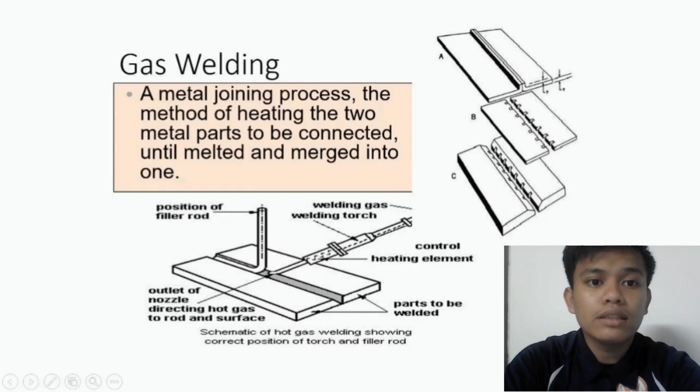Gas welding has two types, that is low pressure gas welding and high pressure gas welding. Low pressure gas welding uses acetylene gas supplied from the acetylene generator at a pressure less than 1.0 bar. High pressure gas welding uses gas from the acetylene gas generator with pressure from 1 to 15 bar.

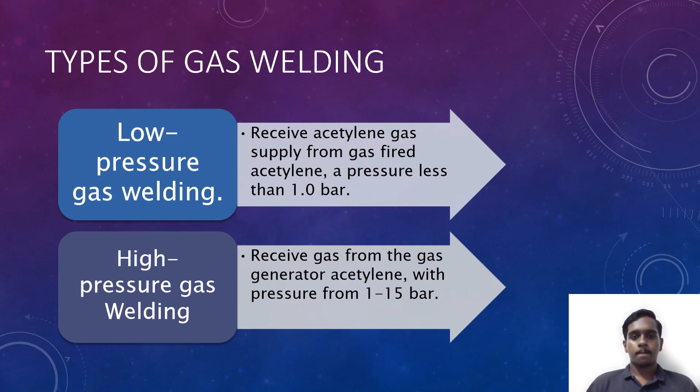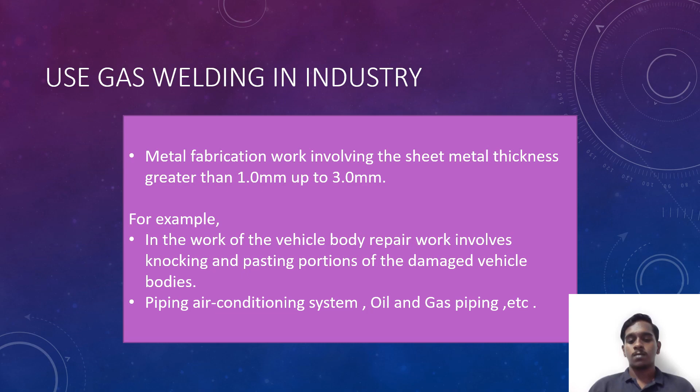Next, uses of gas welding in industry. Metal fabrication: metal fabrication works involving sheet metal thickness greater than 1.0 mm up to 3.0 mm. For example, vehicle body repair works involve knocking and pasting portions of the damaged vehicle bodies. Second, piping: air conditioning systems, oil and gas piping, etc.

The welding profession provides a wide range of career options. Many welding jobs are associated with high-risk work environments such as underwater commercial diving or oil pipeline construction. Expert welders, such as those working on pipelines and in underwater environments, are qualified for the most difficult and therefore highest paying jobs.

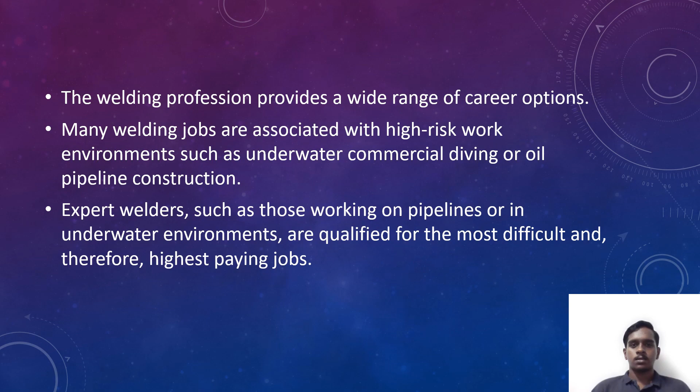Many welding jobs are high risk, so welders must wear an apron, safety goggles, safety boots and more to reduce the risks. Three types of welding, that is metal fabrication, pipeline welding and underwater welding. Metal fabrication: welders that work in metal fabrication are responsible for the assembly, shaping and welding of metal pieces incorporated into structures and machinery.

Next is pipeline welding. Pipeline welders, or pipe fitters as they are often called, are responsible for producing secure pipelines used for transporting water, oil, gases, and other hazardous material. The degree of difficulty in pipeline welding is higher than most other welding jobs because many pipeline welding projects take place outdoors where welders are exposed to unpredictable weather conditions.

Last is underwater welding. Underwater welders are trained to be proficient in wet welding and dry welding techniques. Wet welding involves a special electrode with DC power, and dry welding takes place in a hyperbaric chamber filled with a breathable mixture of helium and oxygen.

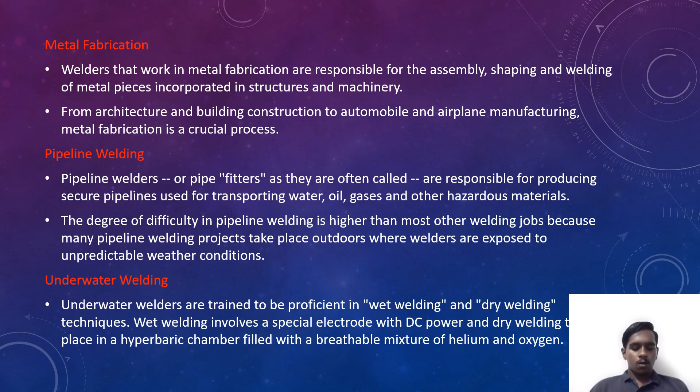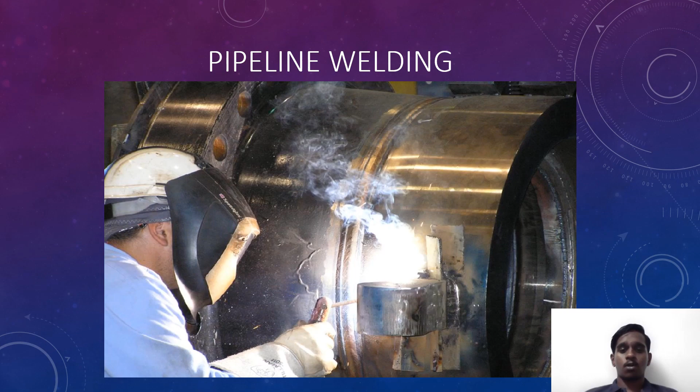Gas welding operation. Gas welding is accomplished by melting the edge of surface and mixing with a gas flame and allowing the molten metal to flow together, thus forming a solid continuous joint upon cooling.

The process is particularly suitable for joining metal sheet and plates with thickness of 2 to 50 mm. The filler material of more than 15 mm thick is added to the weld as the welding rod.

Several gas combinations can be used to produce a hot flame for welding metals. Common mixtures of gases are oxygen and acetylene, oxygen and hydrogen, oxygen and other fuel gases, and air and acetylene. Oxygen and acetylene mixtures are used in much larger quantities than others and occupy a prominent position in the welding

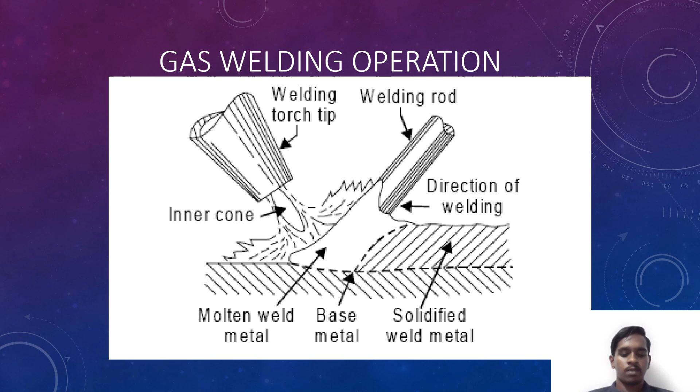industry. The temperature of the oxygen acetylene flame in its hottest region is about 3200 Celsius, while the temperature obtained in the oxygen hydrogen flame is about 1900.

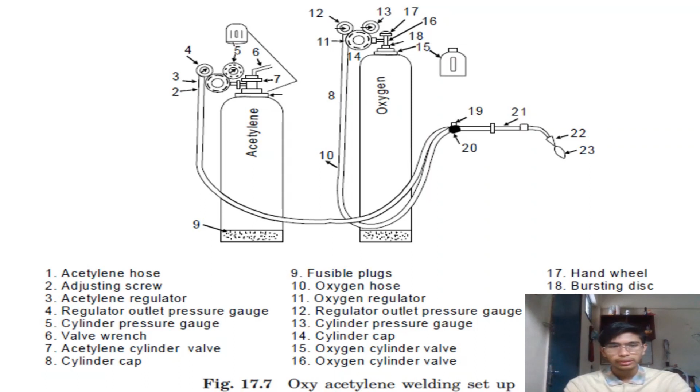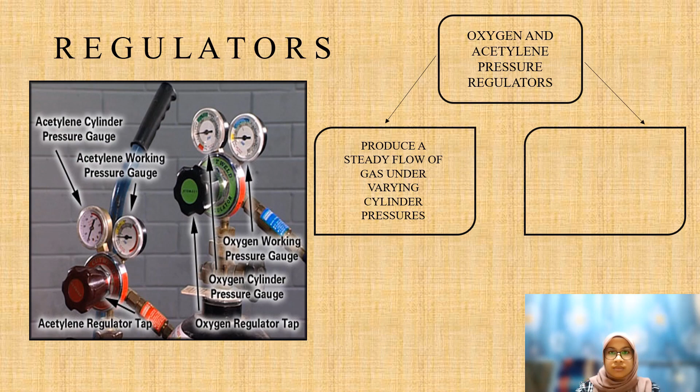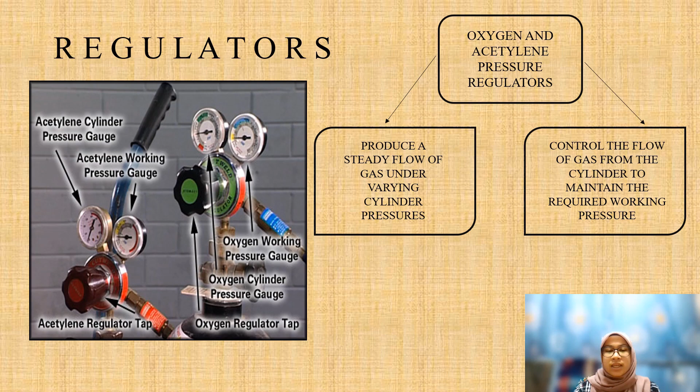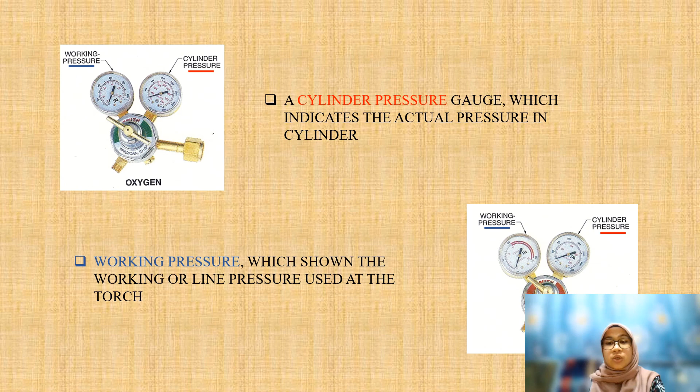A cylinder pressure gauge, which indicates the actual pressure in the cylinder. Cylinder pressure menunjukkan tekanan gas sebenar dalam silinder. Working pressure, which shows the working or line pressure used at the torch. Working pressure ialah tekanan gas yang dikeluarkan semasa melakukan kerja kimpalan.

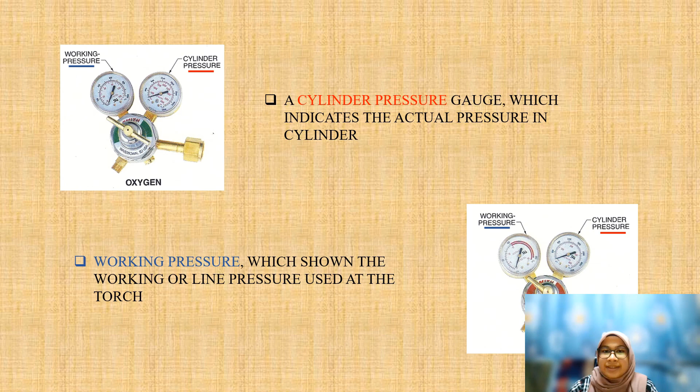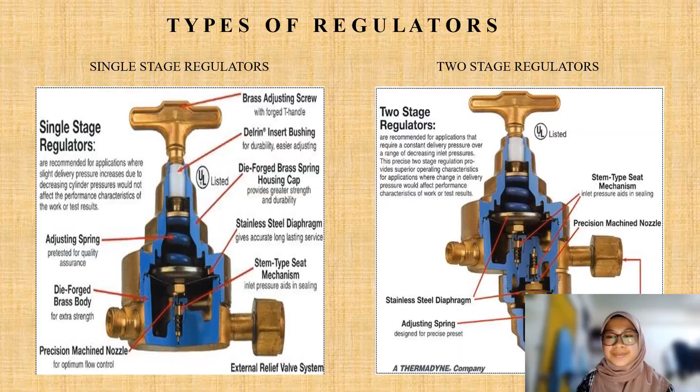There are two types of regulator: single stage regulator and two stage regulator. Firstly, the single stage regulator. Single stage regulator has a high pressure area where the high pressure of the cylinder goes directly into this space.

Secondly, the pressure reading can be seen on the needle, and the regulator reduces the pressure to work in accordance with appropriate adjustment using the adjustment screw regulators pad.

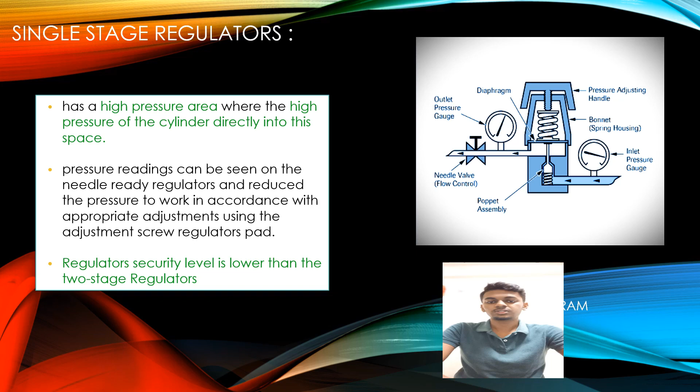Now, two-stage regulator. The two-stage regulator has two chambers: high pressure and low pressure area. Secondly, the high pressure area of the regulator accepts the high pressure in the cylinder and the pressure reading can be read on the pressure gauge.

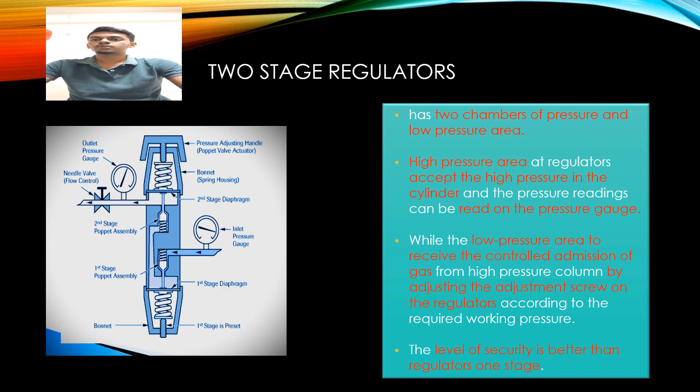In addition, most regulators have two stages. The first stage of the regulator is a fixed pressure regulator whose function is to release the gas from the cylinder at constant intermediate pressure despite the pressure in the cylinder falling as the gas cylinder is used.

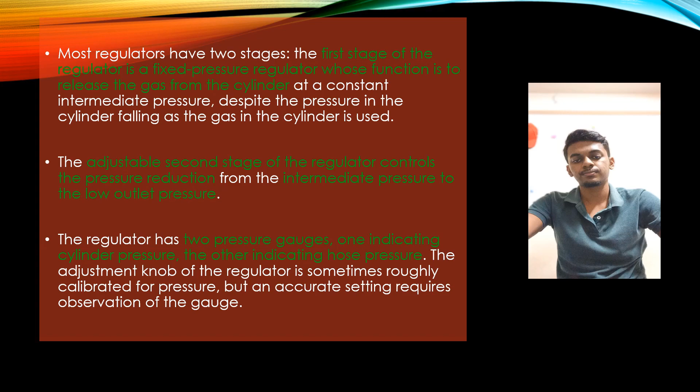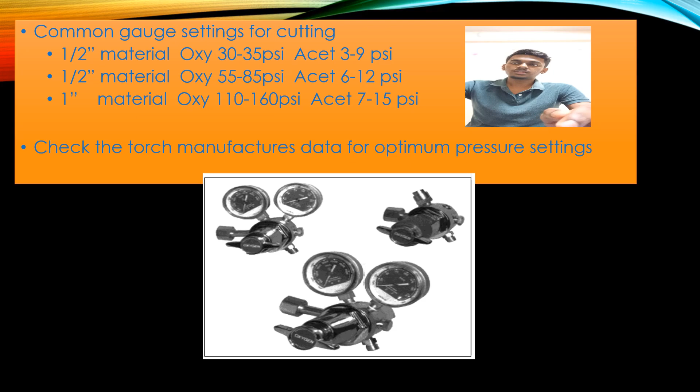The common gauge settings for cutting: one-half material, oxygen 30 to 35 psi and acetylene 3 to 9 psi. For one-half material, oxygen 55 to 85 psi, acetylene 6 to 12 psi. And lastly, for one material, oxygen 110 to 160 psi, acetylene 7 to 15 psi.

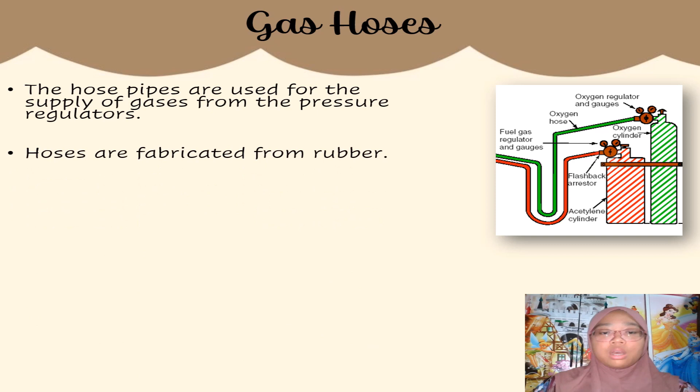So today I will present to you guys about gas hoses. The hose pipe is used for the supply of gases from the pressure regulators. Hoses are fabricated from rubber. Oxygen hoses are green in color and have a right-hand thread. Acetylene hoses are red in color with a left-hand thread. Left-hand threads can be identified by a groove in the body of the nut, and it may have an ACET stamp on it.

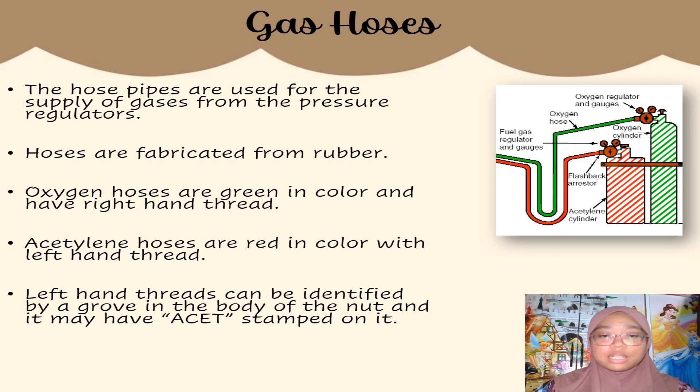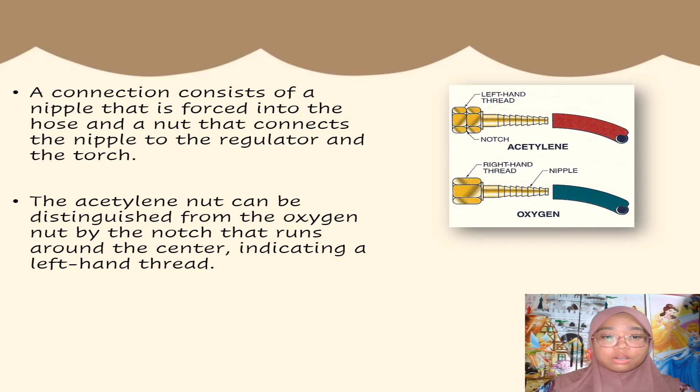A connection consists of a nipple that is forced into the hose and a nut that connects the nipple to the regulator and the torch. The acetylene nut can be distinguished from the oxygen nut by the notch that runs around the center, indicating a left-hand thread. So in this picture we have acetylene and oxygen. For acetylene, we have left-hand thread and notch. For oxygen, we have right-hand thread and nipple.

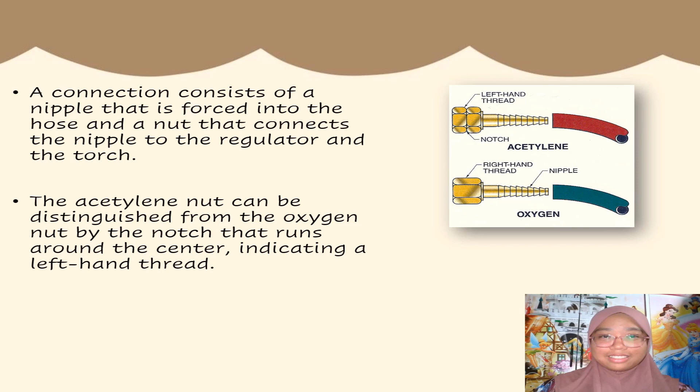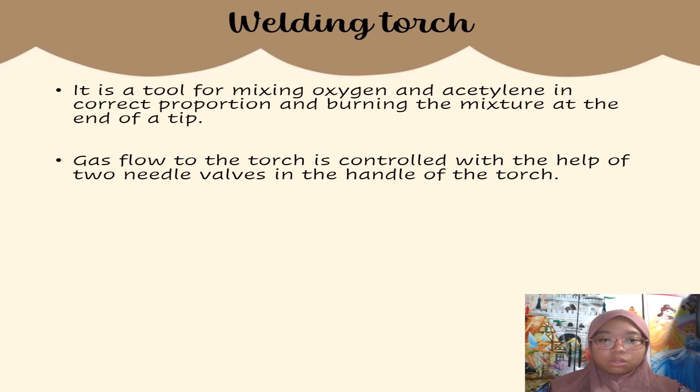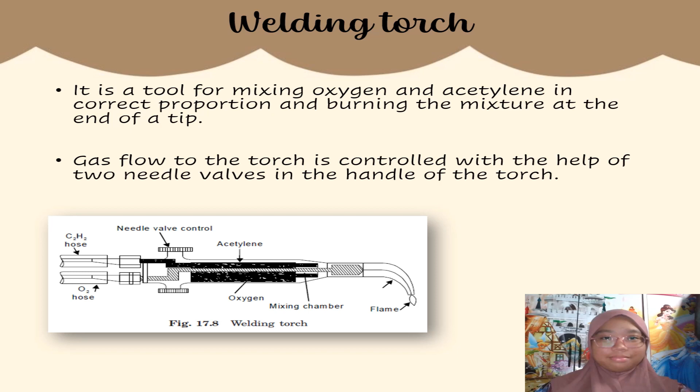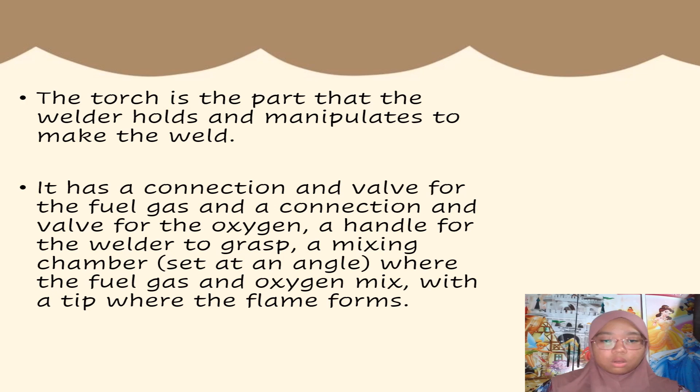The torch is the part that the welder holds and manipulates to make the weld. It has a connection and valve for the fuel gas and a connection and valve for the oxygen, a handle for the welder to grasp, a mixing chamber set at an angle where the fuel gas and oxygen meet, with a tip where the flame forms.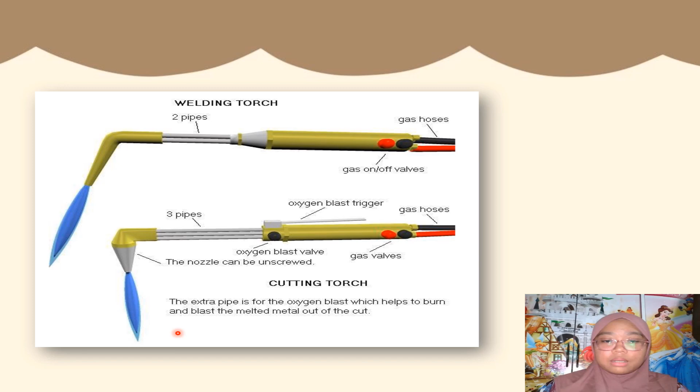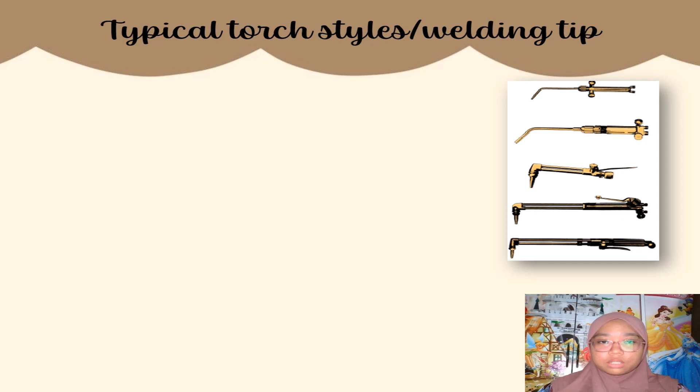Lastly, I will continue with typical torch styles or welding tips. As you can see in this picture, we have many different torch styles or welding tips. A small welding torch with throttle valve located at the front end of the handle, ideally suited to sheet metal welding, can be fitted with a cutting attachment in place of the welding head shown.

Welding torches of this general design are by far the most widely used. They will handle any oxyacetylene welding job. Can be fitted with multi-flame, which is rosebud heads for heating applications, and accommodate cutting attachments that will cut steel 6 inches thick. A full-size oxygen cutting torch has all valves located in its rear body. Another style of cutting torch has oxygen valves located at the front end of its handle.

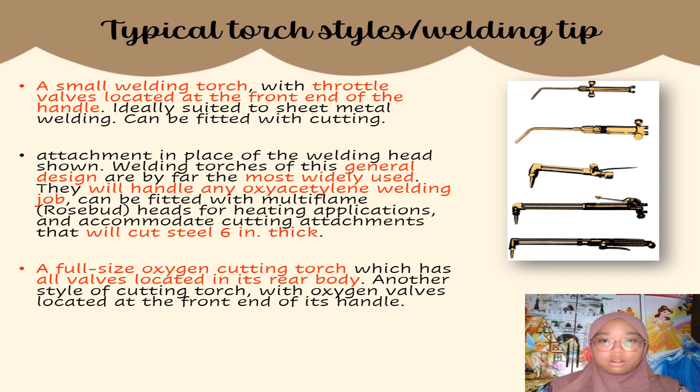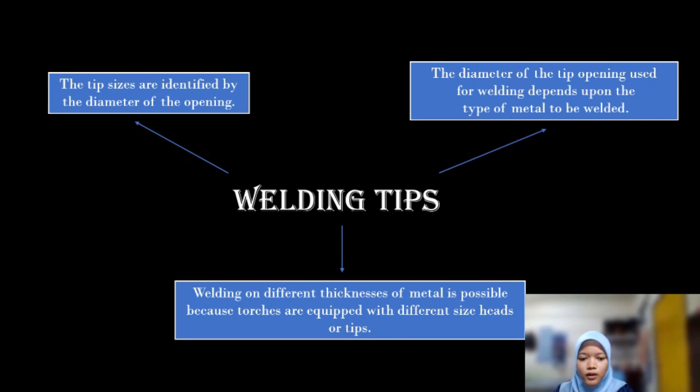Next, I will continue the presentation with welding tips. The tip size is identified by the diameter of the opening. The diameter of the tip opening used for welding depends upon the type of metal to be welded. Welding on different thicknesses of metal is possible because torches are equipped with different size heads or tips.

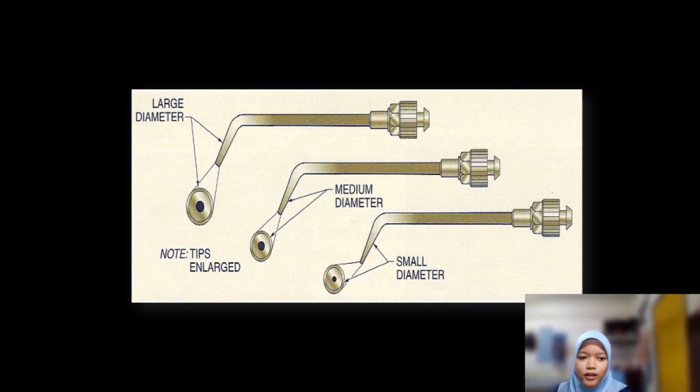So this is the welding tip. They have three sizes: large diameter, medium diameter, and small diameter. Next,

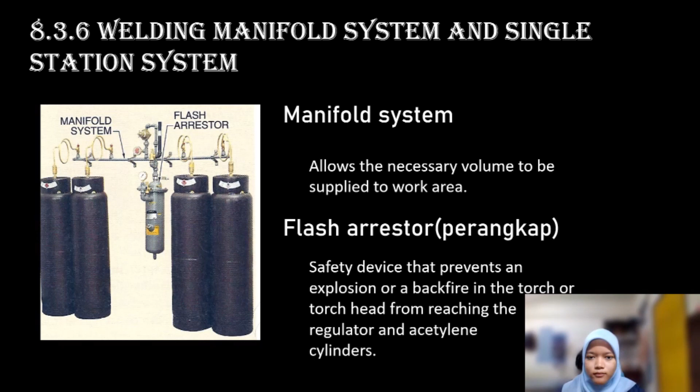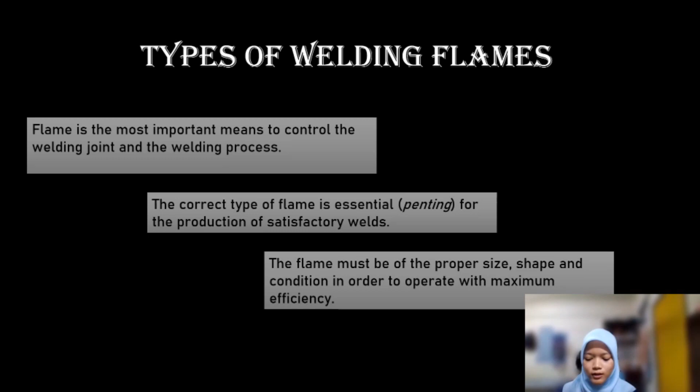So, there are three basic types of oxy-acetylene flames. First, neutral welding flame, which is acetylene and oxygen in equal proportion. Second, carburizing welding flame, or reducing, which is excess of acetylene. And the last one, oxidizing welding flame, which is excess of oxygen.

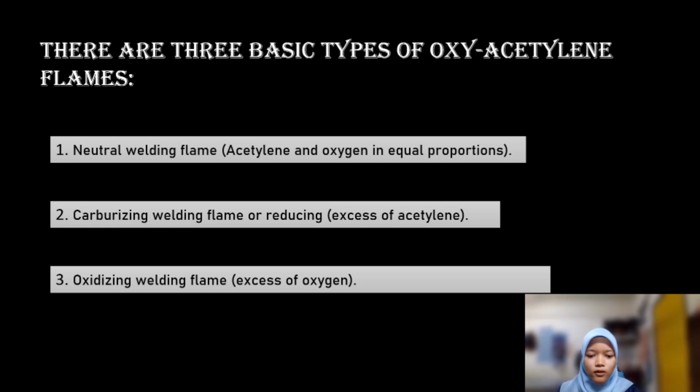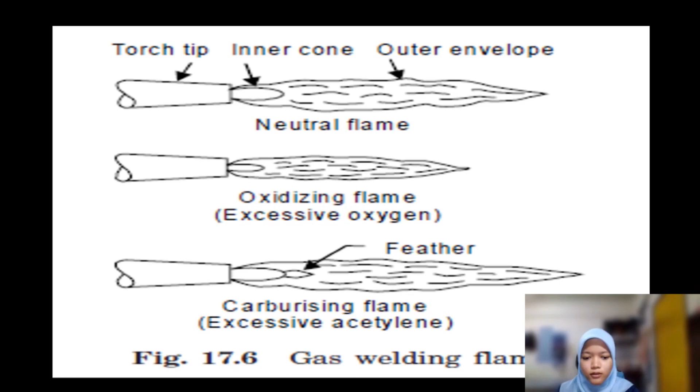So this is the gas welding flame. The first one is neutral flame, the second one is oxidizing flame, and the last one is carburizing flame.

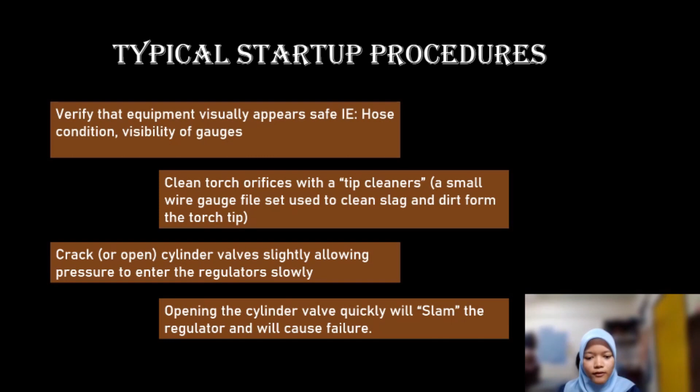Next, typical startup procedures. Verify that equipment visually appears safe, i.e. hose condition, visibility of gauges. Clean torch orifices with tip cleaners, a small wire gauge file set used to clean slag and dirt from the torch tip. Crack or open cylinder valves slightly, allowing pressure to enter the regulators slowly. Opening the cylinder valve quickly will slam the regulator and cause failure.